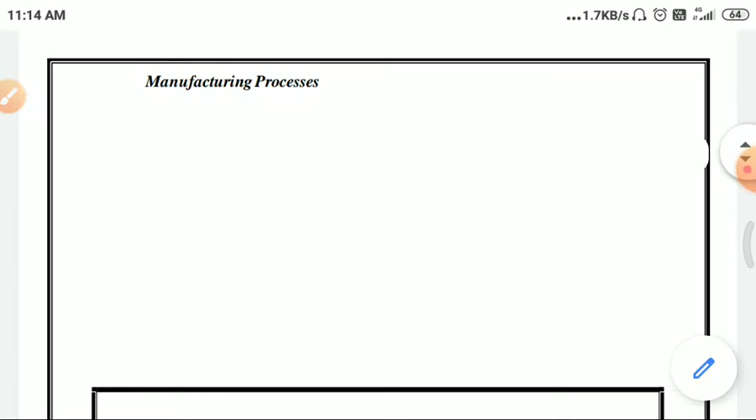In today's session we will see our fourth experiment. It is actually an experiment which we have to perform in the workshop, but due to this situation we will try to understand it virtually. So let's see our fourth experiment, develop a job on पैटर्न.

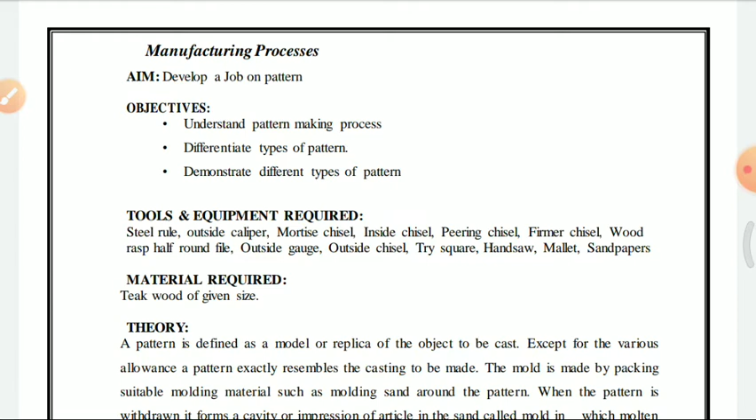The first thing are tools and equipment required. इसमें आपको क्या लगेगा? First one is a steel rule. Second one, outside caliper, if circle is required to be drawn. Different types of chisels. Different types of files. Gauges. Tri-square. Handsaw. Mallet. And sandpaper. These are the tools and equipment required.

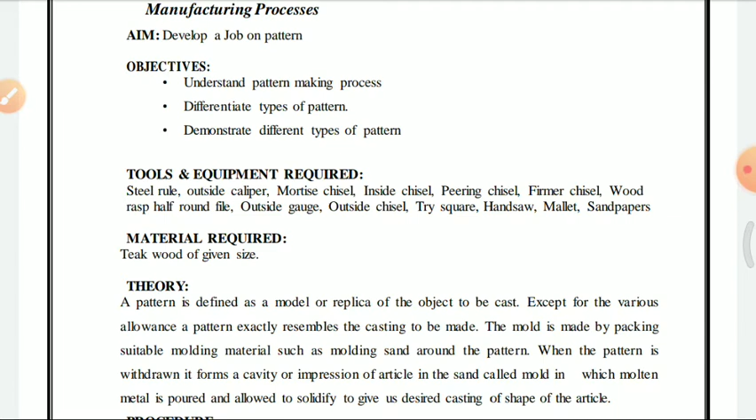Now, material required: we will require a piece of teak wood of required size. The size will depend upon, size किस पे डिपेंड रहेगा? साइज ऑफ पैटर्न. तो ये हमारे मटेरियल रिक्वायर्ड है.

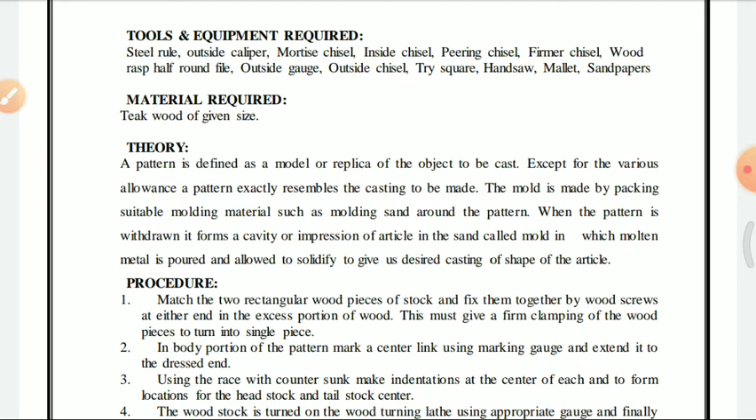इन विच molten metal is poured and allowed to solidify to desired casting of shape of the article.

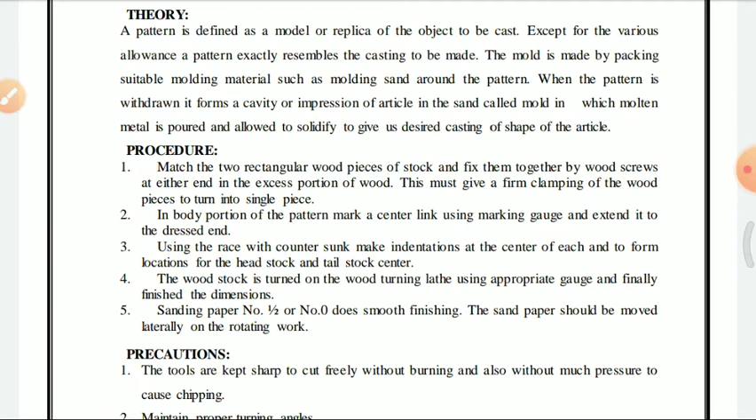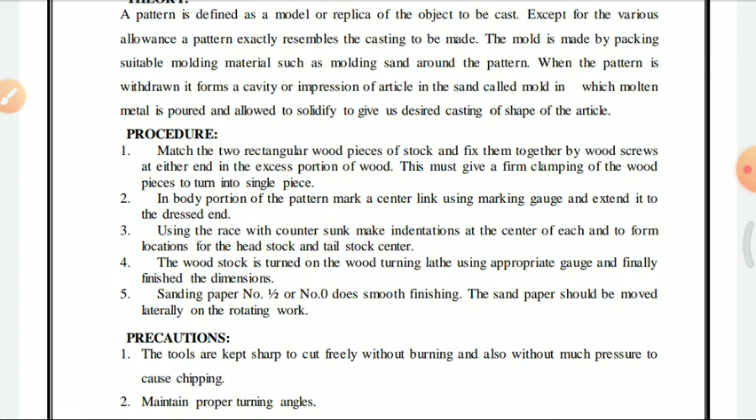तो उसके लिए प्रोसीजर हम देखेंगे। Number 1, match the 2 rectangular wooden pieces of stock and fix them together by wood screw at either end in the excess portion of the wood.

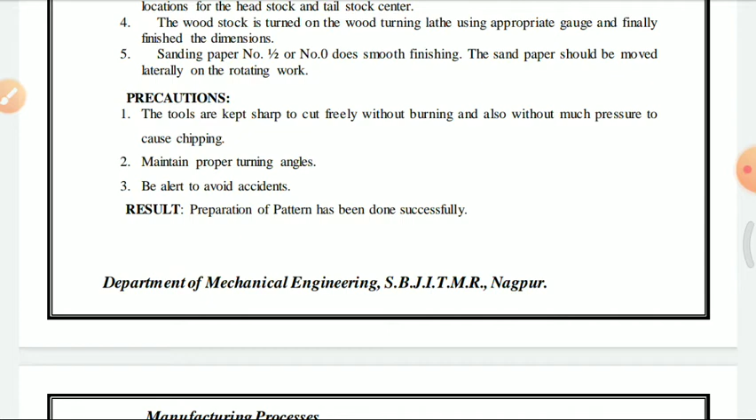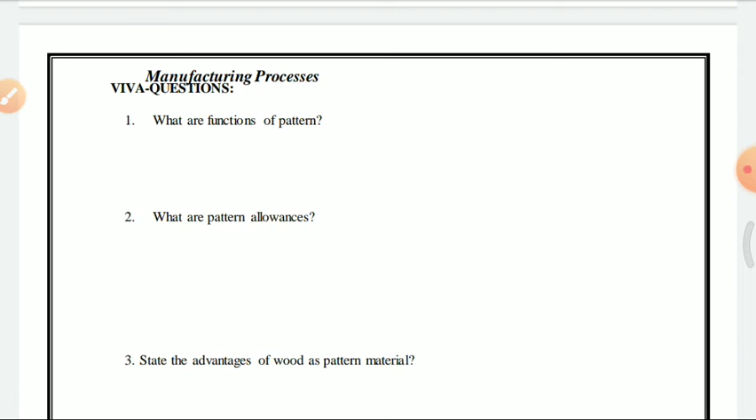As usual, there will be some viva questions. The first one, (ये एग्जाम्पल है, आपको ये सॉल्व करना है हमेशा) what are the functions of pattern? (पैटर्न के फंक्शन आपको यहाँ पर लिखने हैं शॉर्ट में) Second one, what are pattern allowances? And third one, state the advantage of wood as a pattern material.

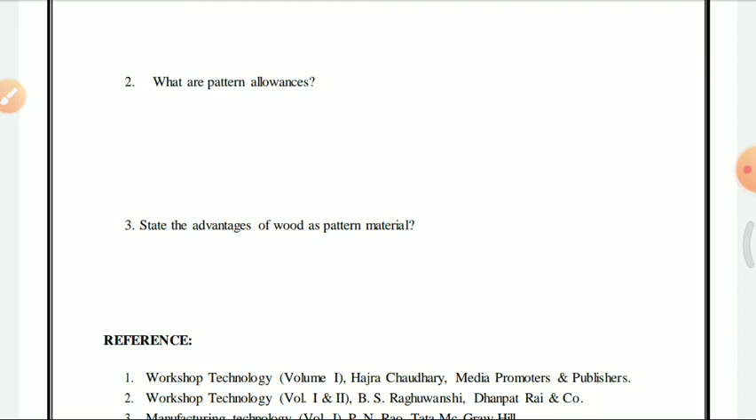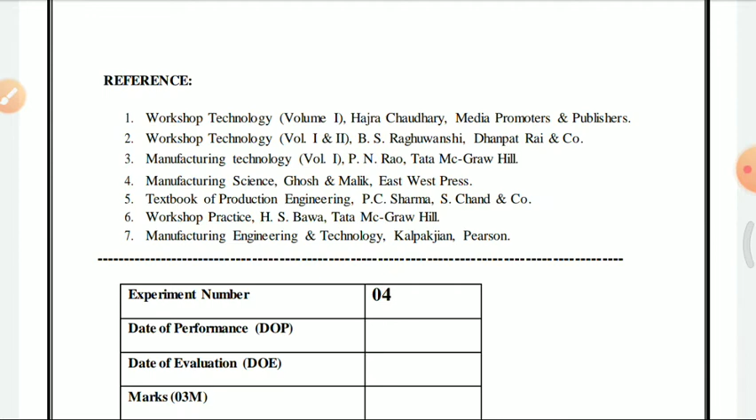So, these are the references which you can refer, and the table at the bottom is for faculty. So, this is our fourth practical. Now, we will see some videos from which it will be clear how to make a wooden pattern. So, let's see the video.

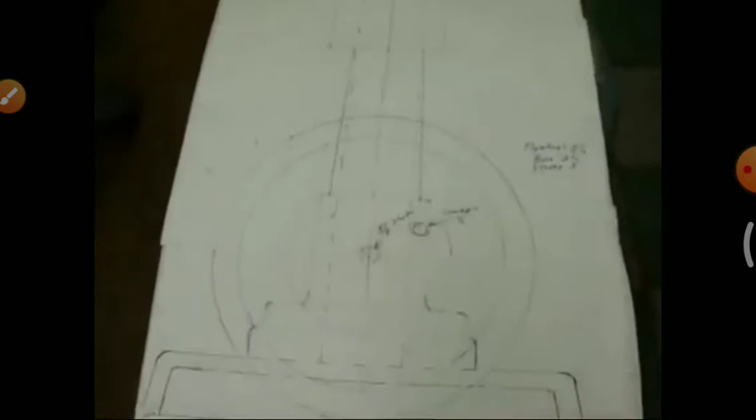I'm not sure if this will show up, but I got a rough drawing here. It's going to be about 16 or 18 inches high with an 8-inch flywheel, and the cylinder, I made a cardboard cutout of the cylinder. It's going to have a 3-inch stroke.

This is actual size. So I'm going to make a wooden pattern of the casting, and from the wooden pattern we'll make a sand mold and pour molten aluminum into the sand mold, and we will end up with a cylinder casting. I probably won't show you how the main frame is made, because that would take too long. But the subject of this video will be pattern making. So I'm going to give you just a few little basics on pattern making before we start.

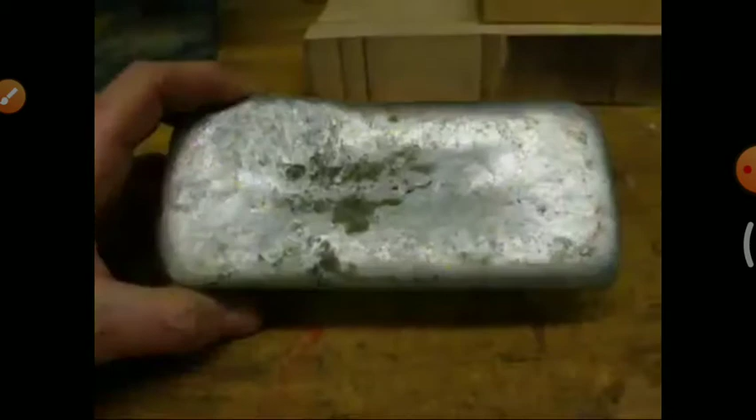When a pattern maker makes patterns, he has to take into account the shrinkage of the metal. Now we're going to be pouring aluminum. There's two kinds of shrinkage that we have to deal with. One is the shrinkage that you see in this ingot. That's a commercially made ingot of aluminum, about 5 pounds. But when aluminum...

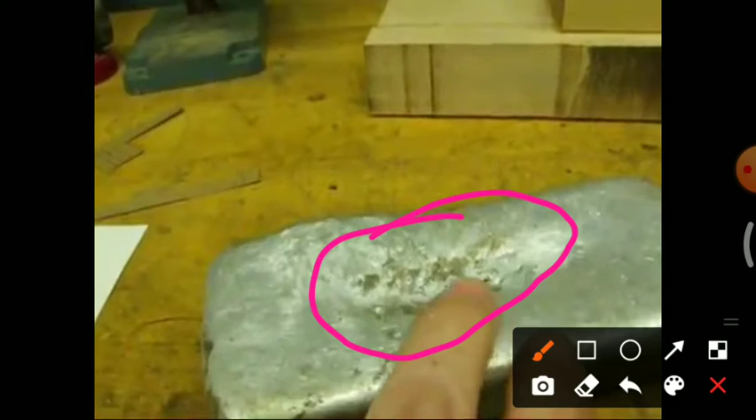As aluminum solidifies, or actually any metal solidifies, it shrinks across the heavy sections. So there we got a shrink hole, and you can even see some hot tears in there. That's about a 1/2 inch deep. And we've got to avoid that at all costs, and we avoid that in several ways. Number one, we avoid the thick cross sections.

If you look at any castings, you're going to generally see that they're hollow. Our casting will be hollow, and it will have a core in it to produce the cylinder where the piston moves up and down.

And then another way is, if you can't totally avoid real thick sections, you employ a riser in the mold itself, which is nothing more than a great big cylindrical plug of waste metal, and you allow the shrinkage to occur there where it doesn't matter, and that can be thrown away and remelted.

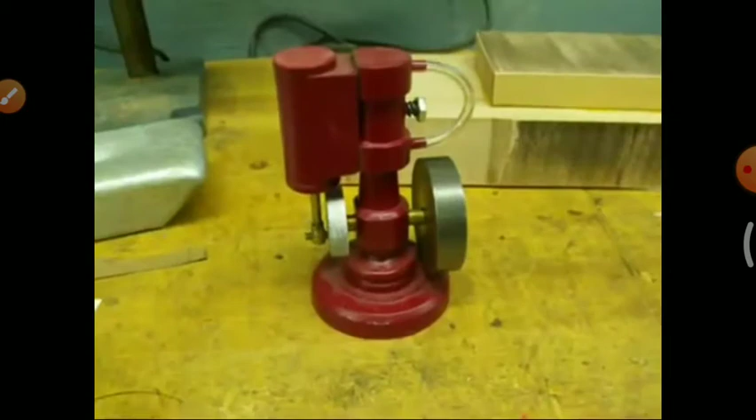So that's one shrinkage. Now the other kind of shrinkage that we have to deal with is the linear shrinkage in any given piece. Now if you make a casting of aluminum that's exactly a foot long, it's going to end up being 3/16 of an inch shorter than that, because it's going to shrink as it cools. Of course it'll shrink in the other directions as well.

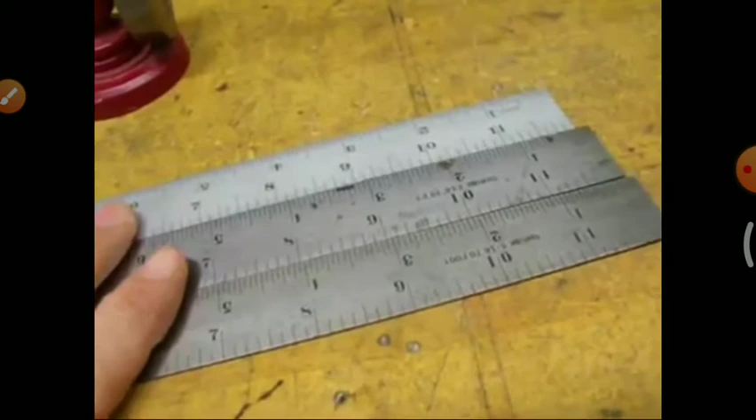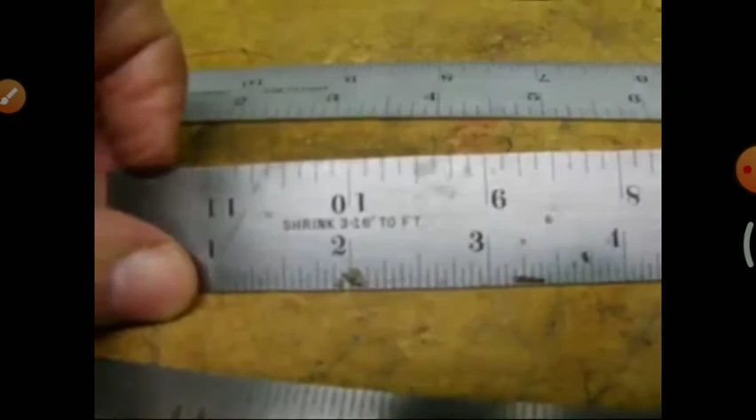But a pattern maker employs shrink rulers. And if you look on these rulers here, this one says shrinkage 1/16 to a foot. Now that's used for one kind of metal. This other one is 3/16 to the foot. Now that's how much aluminum shrinks. So that's the one that I'm going to use in my pattern making.

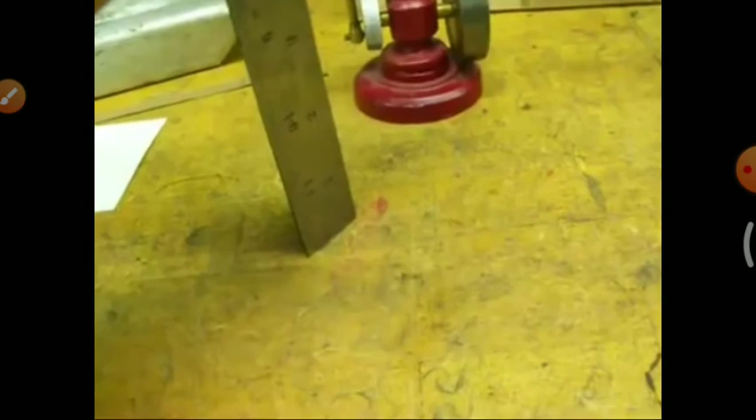And then we have yet one more here. But interestingly now, if I take these three and I get them even down at that end where they're touching the table, now we take a picture of them at the other end. Notice that all three rulers are different lengths. That's because they are different shrink rates and they're to be used to make patterns for different metals. We'll use again the 3/16.

Be careful you don't mix up your shrink rulers with your regular rulers or you're going to get inaccurate whatever it is that you made. That happened to me and my brother when we were kids. My dad had some shrink rulers and we kind of couldn't understand why they were different lengths. So, in other words, we're making the patterns slightly larger than the size that we want.

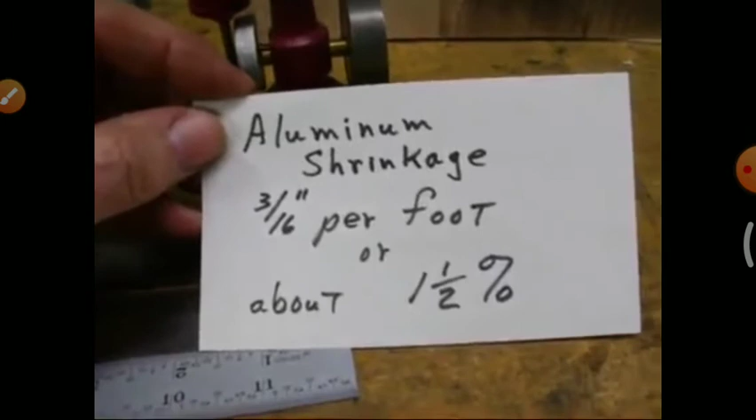Now I know that some of this is tedious and boring, but you're going to have to stick with me. On this little card here, aluminum shrinks at the rate of 3/16 per foot, which is about 1.5% calculated. Not a whole lot, but it could be significant in something far more important than what I'm doing right here.

Okay, we're back to this silhouette of the cylinder. And again, I told you that we're going to use a core. Now this is the core. I already made the core. This is a piece of 2-inch diameter. It's about 10 inches long. It might be a little longer than what I need, but I already made myself a core box and I produced this because I'm going to kind of work around this.

This is silica sand and it's harder than a rock. Now, in one of the other videos, I'm going to make this core for you, but we're probably not quite ready for it, but a core is used only one time, and then it has to be broken out in order to get it out of the mold. All of the cylinders in your V8 engines and your V6 engines that are cast at General Motors have cores in them. And matter of fact, whenever you talk about a freeze plug on an engine, the correct name is core plug.

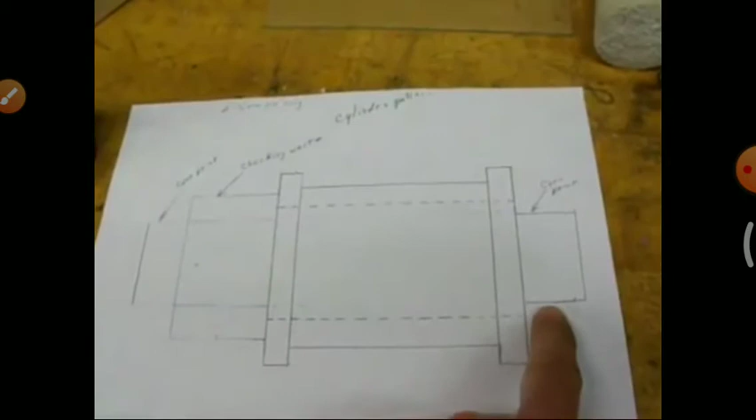And this drawing I made up, I don't really bother with measured drawings, but this is a to-scale drawing of what this pattern will look like. And you can see that we've got that in here, but these other parts here are the core prints. This is a core print on this end, and this is a core print on this end. The core print makes a depression in the sand.

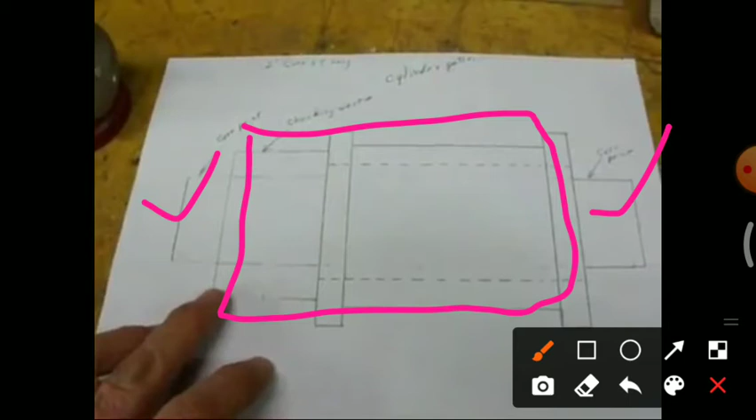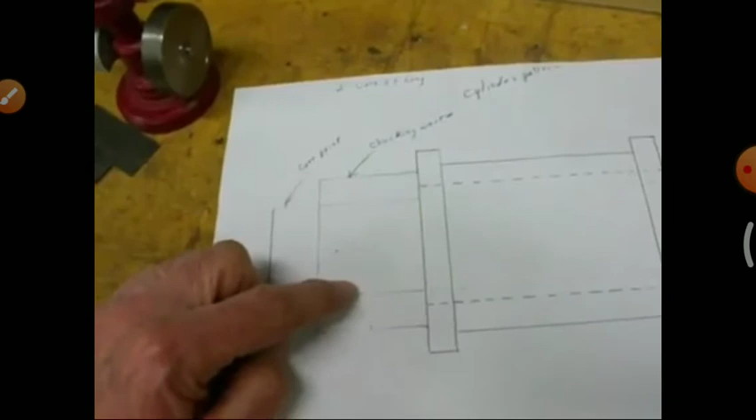And the core can be laid in that depression. Also, I like to have a way to hang on to a casting when I machine it. So this area here, actually it's not that little, will be an extension onto the cylinder that will allow me to chuck the thing so I can hold it and bore it. Not too much thought is given by some people as to how you're going to hold a casting in order to machine it.

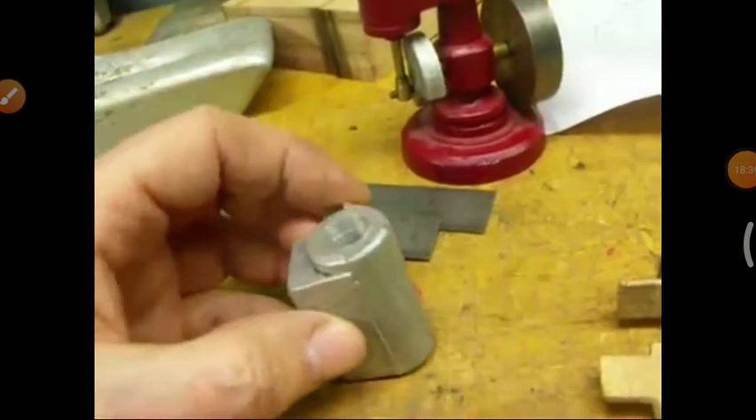Okay, back to this little engine. In one of my other videos, there's the cylinder. That's your actual part that's been machined. But what we're making today is actually a pattern similar to the one used for this. Now, this is a real small one.

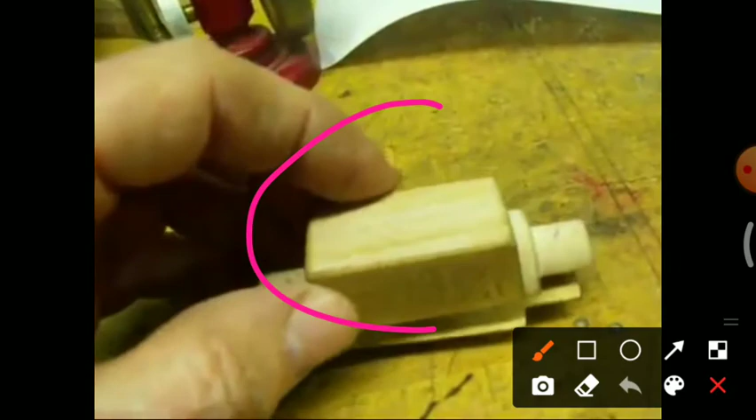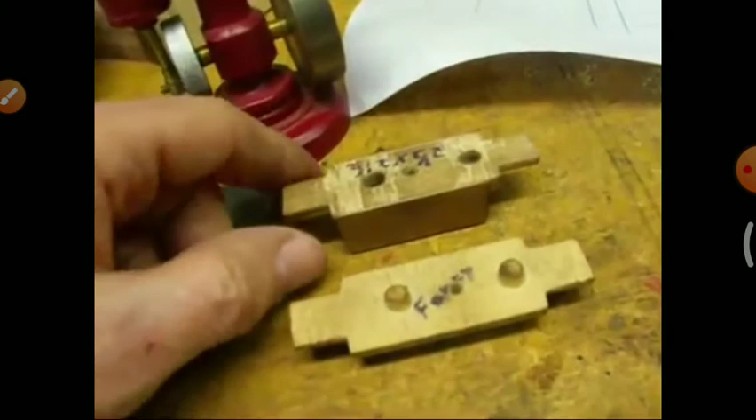This is called the parting plane, or the parting line between.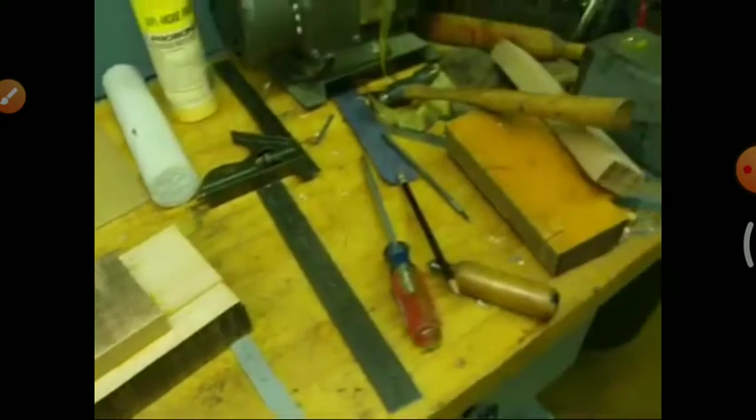I've already glued up some pieces of maple that I'm going to make the pattern out of. So there's one of them. The other is still in the vise here. Now the glue has dried, and I'm ready to take that out and lay it on the bench and show you what.

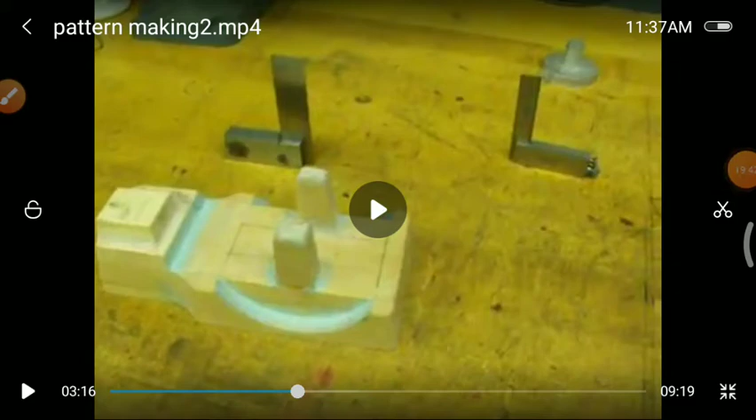Pattern has to be able to pull out of the sand. So this pattern that I made some time ago for a little engine, you can see that it's tapered really in every direction. That is, from the ends and from the sides, even some taper here on the little pedestals and taper here. And when you turn it over on the back side, you can see that it's, maybe you can't see, but that is all tapered.

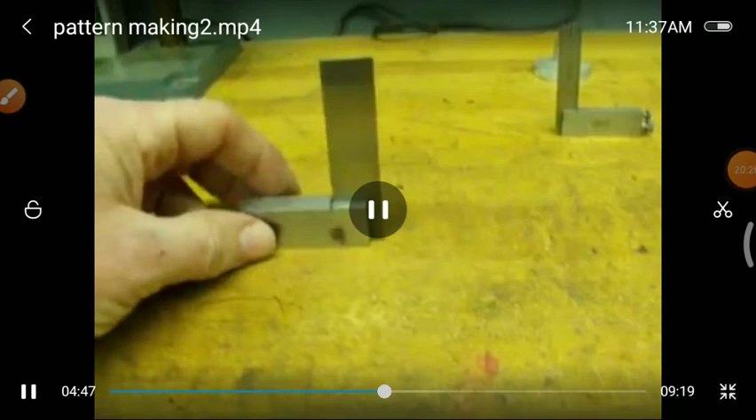I'm using a little die maker square. This is a die maker square, Lufkin, and it can be adjusted so that it's not square. And I'm going to hold it up against a 90-degree square here, and you can see that there's a difference.

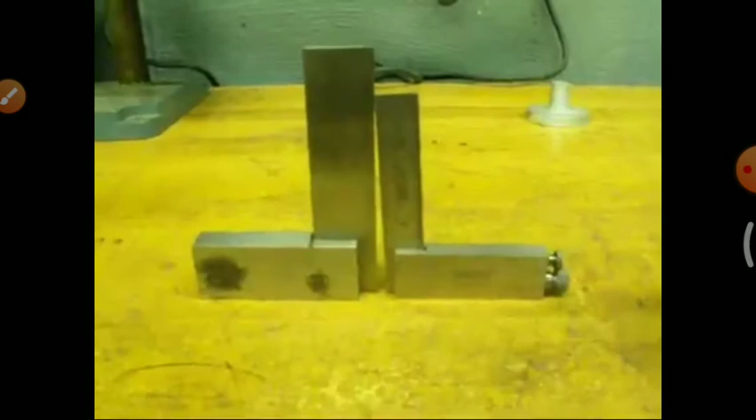So I have two adjustments here. One to lock the blade, one to get it off of 90 degrees. So I set that for 3 degrees, and then that's what I will use to double check my tapers.

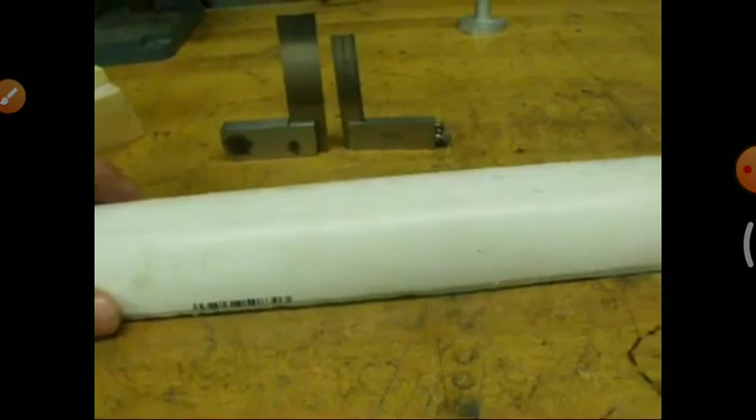But generally I will sand them on or saw them on. Now this particular project that we're doing, it is cylindrical in shape, so naturally a semi-cylinder is going to pull out of the sand very easily because it is tapered in all directions.

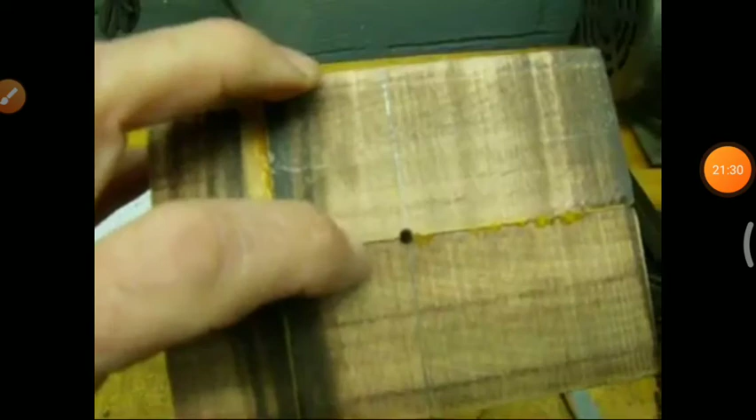Back to this for just a moment. I will also be making holes on both ends so that we can mount it on the lathe.

Drilled with an 1/8 inch ball end mill onto each side, and I'm going to open that up with a center drill. One end, of course, is going to be supported in the live center of the lathe when we turn it between centers, and the other will be supported driven in the headstock with a spur center.

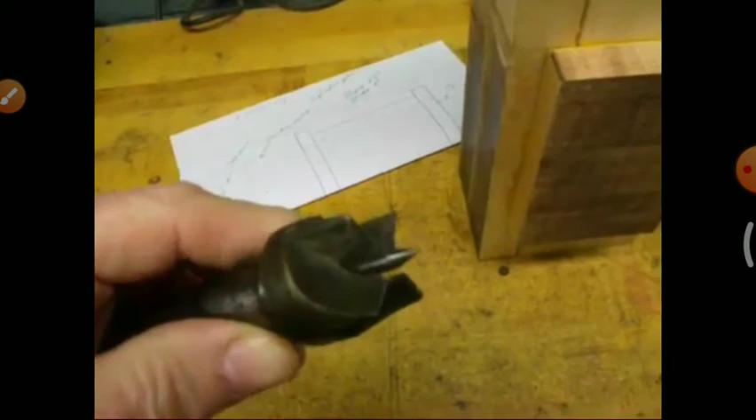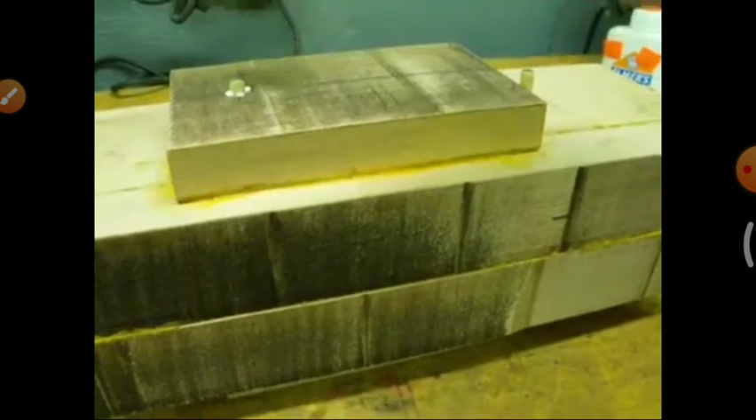All right, I've drilled holes that are a little bit deeper than halfway, and I'm going to drive some dowel pins in, just wooden pins. We'll put some glue on them because a split pattern will form. That way, when we turn this on the lathe, these don't go all the way down - they're just enough to plug the hole so that when we turn them, that'll be incorporated into a nice smooth finish.

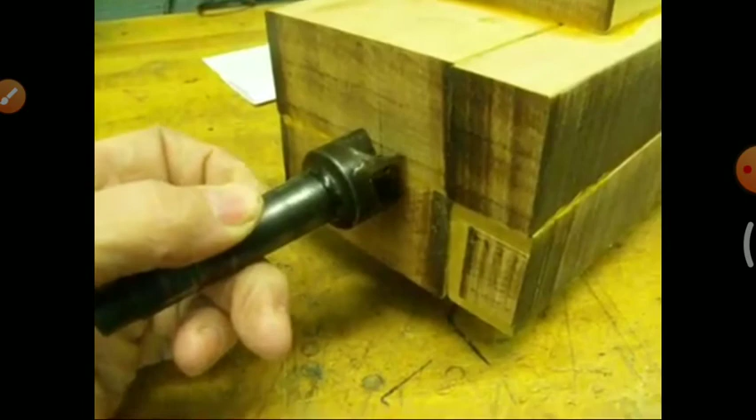And I did center drill the ends. Next thing I'm going to do is tap the center with a spur, using a lead hammer to mark and hit the wood. And I'm going to saw some little crisscross slots so that this will fix the two parts on top of each other properly.

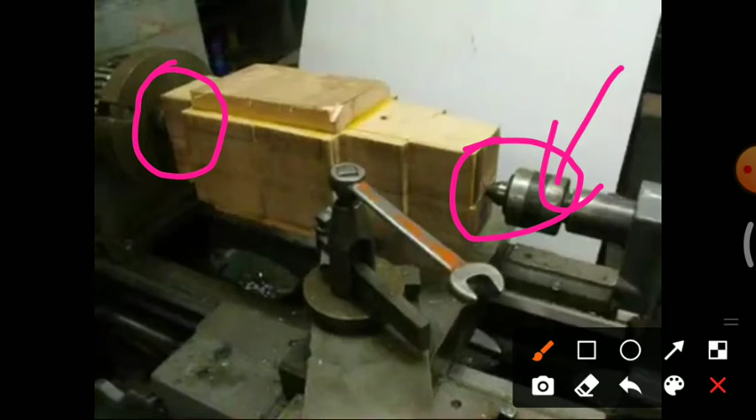We got the workpiece held between the centers. Got a spur center - I don't think that's going to show up on the headstock end - and just a ball bearing center on the other end.

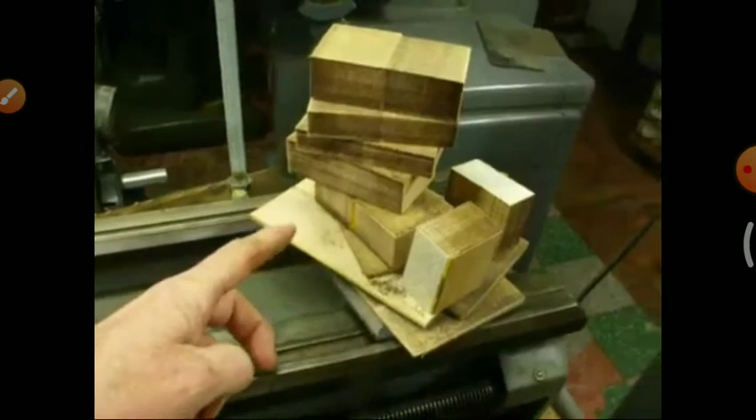Now, I took that to the bandsaw, as I told you, and this is how much wood I removed. That was wood I knew I didn't need, so that's quite a savings there. But there'll still be an awful lot of chips produced.

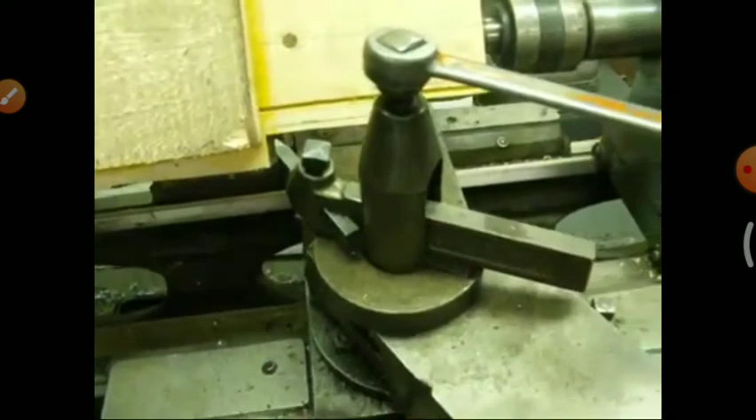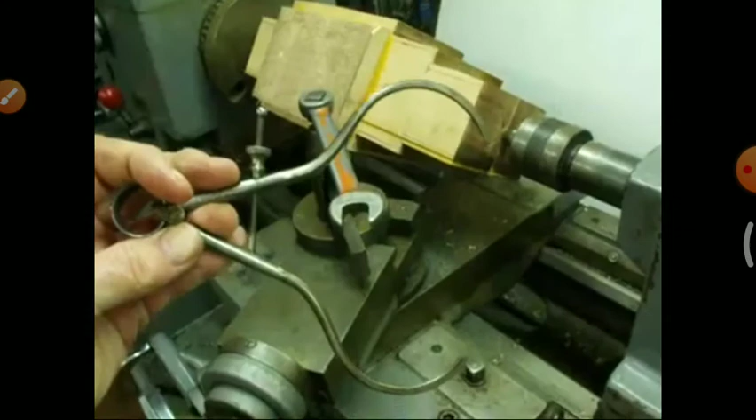Now, I've got a piece of high-speed steel in there as a tool bit, just with the old lantern rocker type tool post. And I'm going to start by turning the major diameter down first, and I'm just using outside calipers to check. As I get closer to the dimension, I will use a micrometer.

I like to turn wood as if it is metal, and that's why I much prefer to do it on a metal lathe. Some of you might say that's crazy, you don't turn wood on a metal lathe. Well, I do. I don't own a wood lathe, and I just prefer this method because there's total control over the tool and the dimension. And this isn't a bowl or a candlestick here - it's something that is going to be very close dimensionally.

So I'm going to take a couple rough cuts, and then I'll turn the camera back on as I do a little bit of the turning. This is probably 2 hours worth of turning, so naturally you're not going to see all of this.

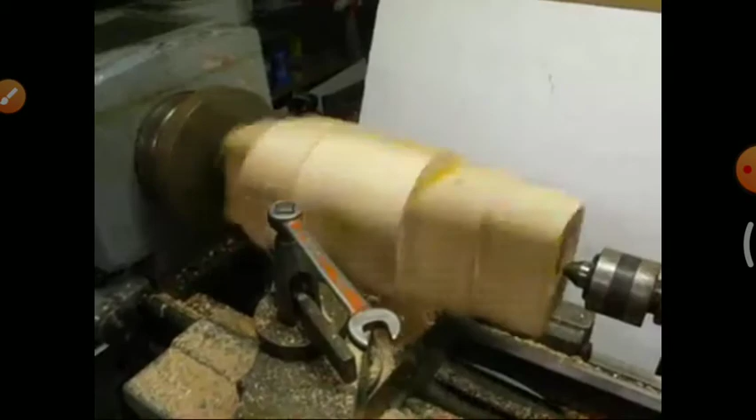Next thing, I'm going to turn down this diameter, which is the core print, and that'll be 2 inches. But I will do all of the turning on this end, and then when that's done, I will reverse the work so that this end is down on the tailstock end.

Now, the final dimension here on this core.

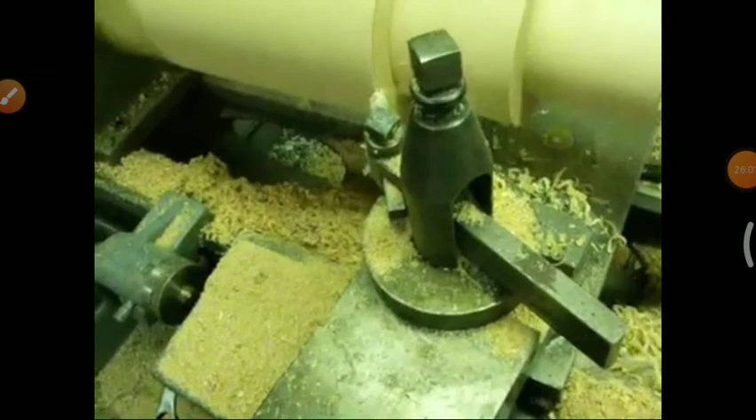Now, if we would check this with a square, this corner here would be 90 degrees. That all needs to be touched up with sandpaper in the corner. Feel whether or not you need to take up any slack.

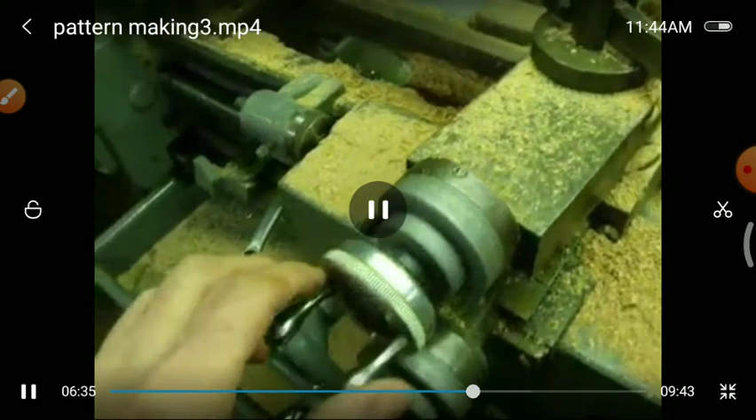With the compound, again, set it at 5 degrees like we did last time. That gives us the pattern draft that we need on that last step.

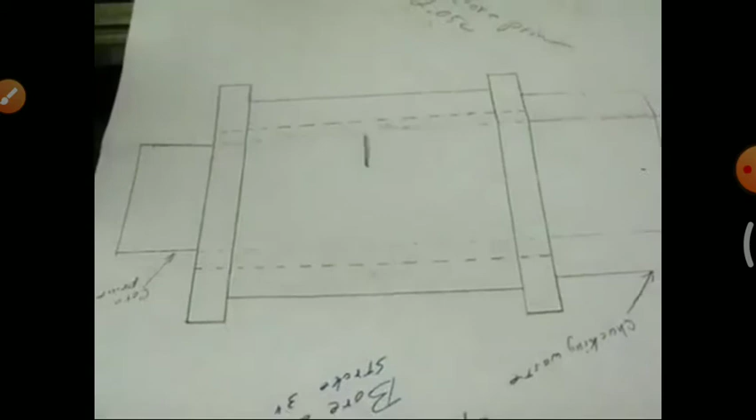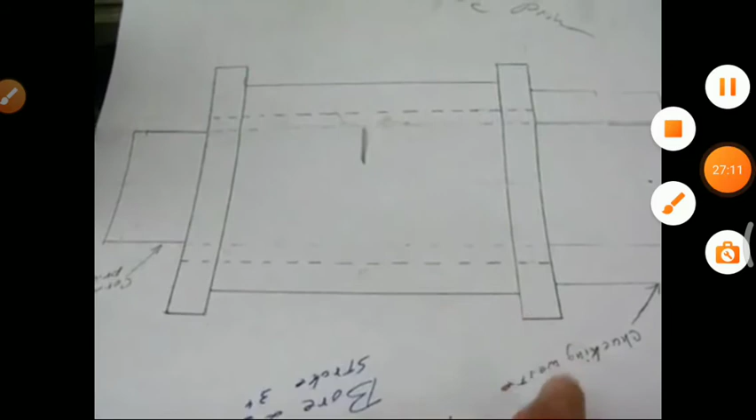We're now going to turn this diameter, which will be 3.5 inches, and we've got a step on each side. So I'm going to do about half of it feeding toward the headstock, and then reverse the work and finish it off so I can get at that other step. Or I may decide to use a left-hand tool and come in that way. Not sure how I'll do it yet.

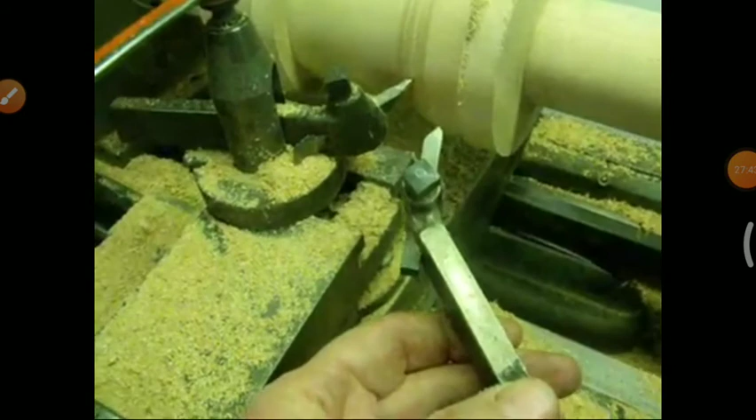Okay, I've switched tool holders and tools. The one in my hand is the one I'd been using a few moments ago, but now I have a different setup.

I've also moved the carriage stop over on this side. We got going here where the glue lines were, and then over here, of all places, my dowel pin ended up right on the shoulder, that plug dowel pin, so I've got to fill that up a little bit and then sand it. No matter how careful you try to plan some things, that's what happens. So I will fill that, and next time you see this we'll be over on the bench and we will attempt to separate it.

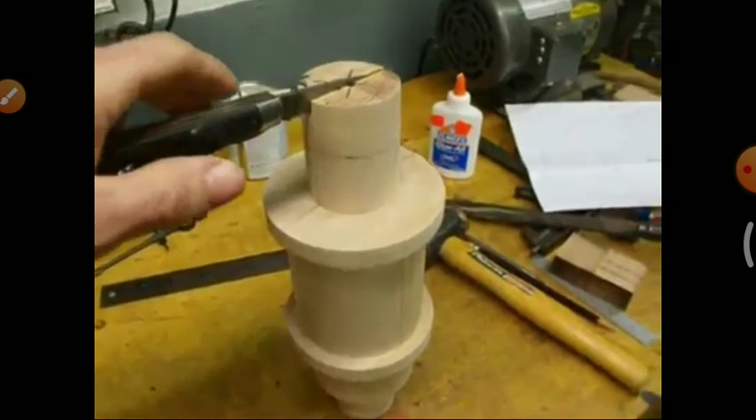The next thing we need to do is split the pattern. It started as 2 pieces, and I glued it together with a piece of paper in between. You remember from your 8th grade shop class when you did turning on the lathe that you probably did something similar to this. I'm trying to do this with one hand, just working my Boy Scout knife down, and you can see it's separating. I'm going to do that the full length here, but I have to put the camera down to do it.

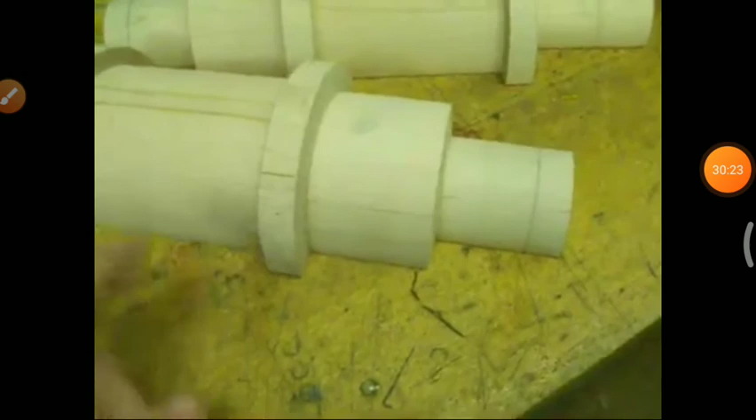So I'm going to install some dowel pins on one side, taper them ever so slightly, and they will align with a fillet in here, which we'll do with body putty, I believe. There will be fillets in here. No need for it here.